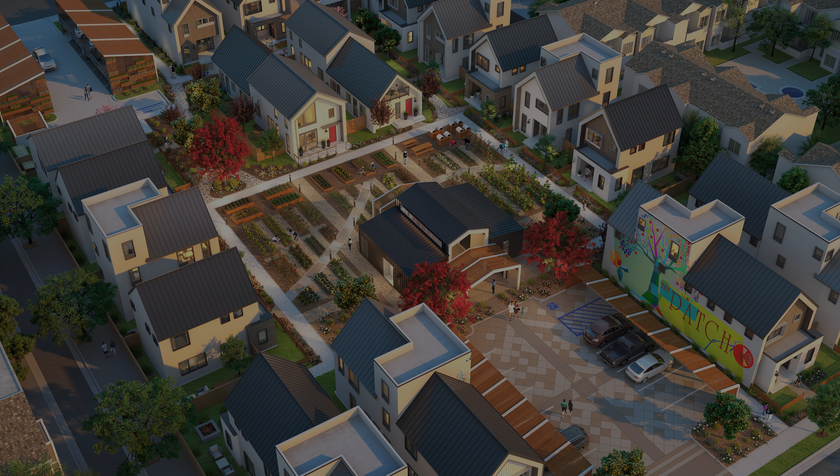The United States currently grapples with a housing shortage of between 4 and 7 million homes, a number that continues to grow. Interest rates may rise or fall, but until the root of the housing supply issue is addressed, widespread unaffordability will persist, and many Americans will find homeownership out of reach.

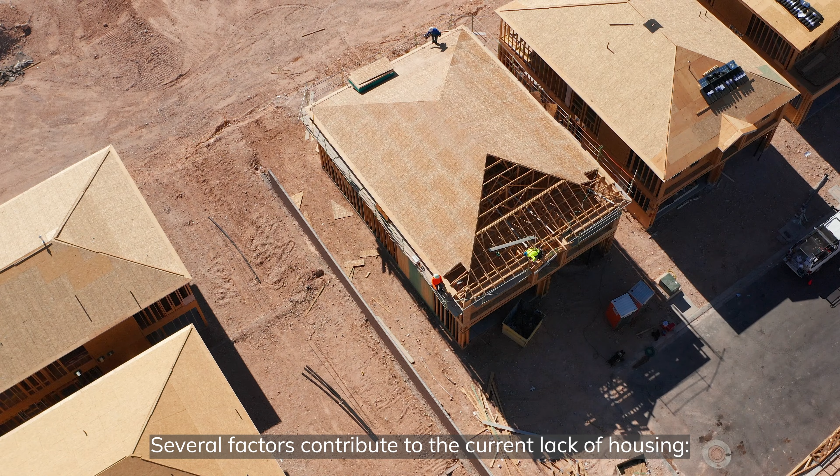Several factors contribute to the current lack of housing: labor and material costs, land values, government regulations, and approval delays, among others. Looking to create more attainable housing, many developers have prioritized development of smaller homes, situated closely together to minimize land use. Reducing both material and land costs can reduce the expense passed on to buyers, expanding affordability.

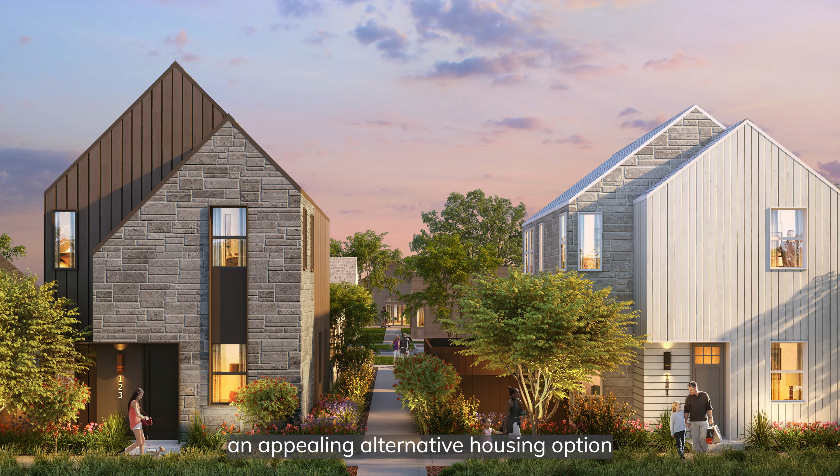Additionally, young families may find small homes on small lots an appealing alternative housing option through build-to-rent communities.

However, city planning requirements often limit these strategies. Zoning regulations and parking minimums drive up both home sizes and paved site area. Aggressive parking requirements have led to nearly 2 billion parking spaces throughout the United States, roughly 8 parking spaces per car.

Municipalities have noticed the negative effects of overparking on new housing development and have responded by reevaluating parking requirements, particularly in transit-oriented communities. In 2017, the city of Buffalo, New York was the first in the United States to abandon parking minimums. Since then, other cities have followed their lead, from Santa Monica, California to Hartford, Connecticut.

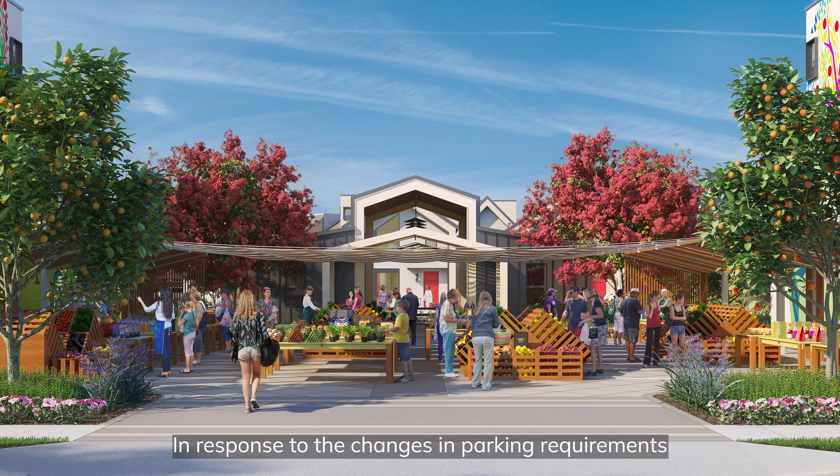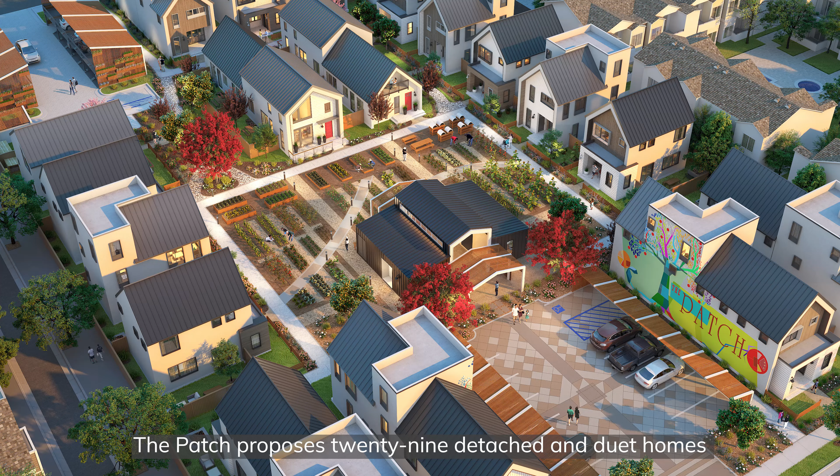In response to the changes in parking requirements and the widespread demand for more attainable housing, KTGY's Research and Development Studio developed the Patch, an infill design solution for walkable, attainable housing. Designed as an agri-hood community, the Patch proposes 29 detached and duet homes situated around a working community farm.

Elimination of internal streets in favor of a network of walking paths and increased shared outdoor spaces helps to encourage community engagement. Mechanical parking located toward one corner of the site serves residents while prioritizing an active and engaged lifestyle over the convenience of attached garages.

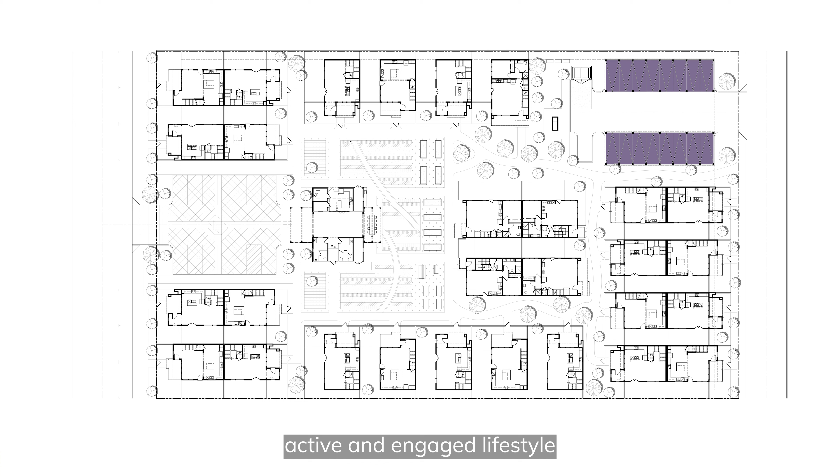A small guest parking court located toward the front of the site doubles as a space for community gatherings such as a farmer's market. The community farm is centrally located within the site, with a community building positioned between the entry court and farm to provide restrooms, storage, and a community kitchen supporting neighborhood events.

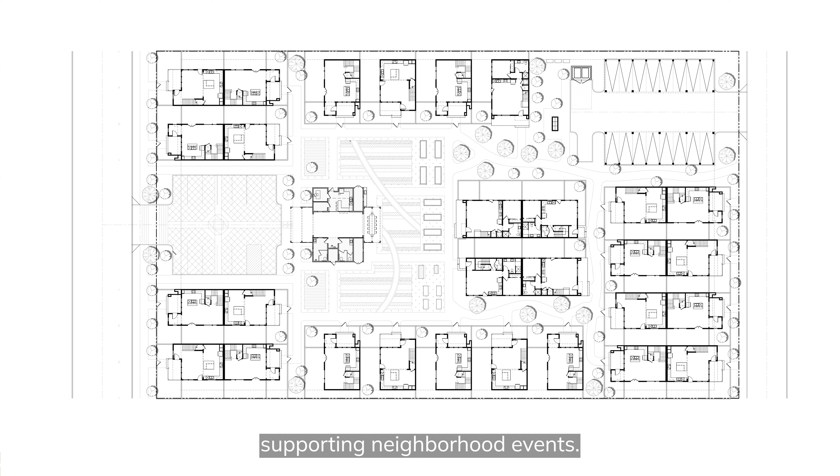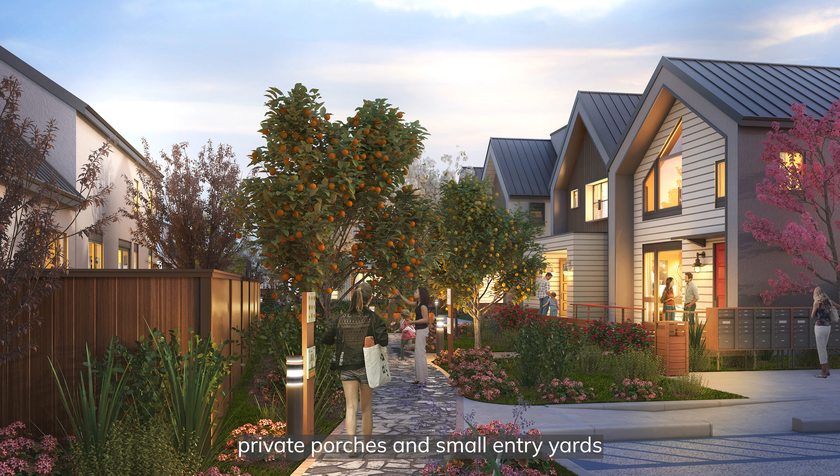Oriented around the shared community spaces, the Patch includes modest homes ranging in size from 1,000 to 1,500 square feet. Though the homes sit closely together, private porches and small entry yards create layers of privacy within the community.

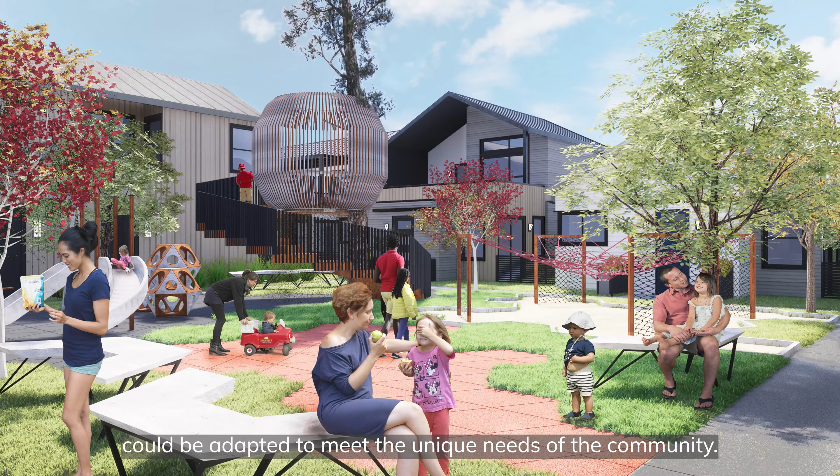The central community farm within the Patch neighborhood aims to encourage healthy eating and social connectivity. However, the shared outdoor amenity space could be adapted to meet the unique needs of the community. Whether a heavily programmed play area or a more flexible open green, the sharing of outdoor spaces brings neighbors together, supporting social connectivity while reducing costs that would otherwise make this type of community unaffordable to many.

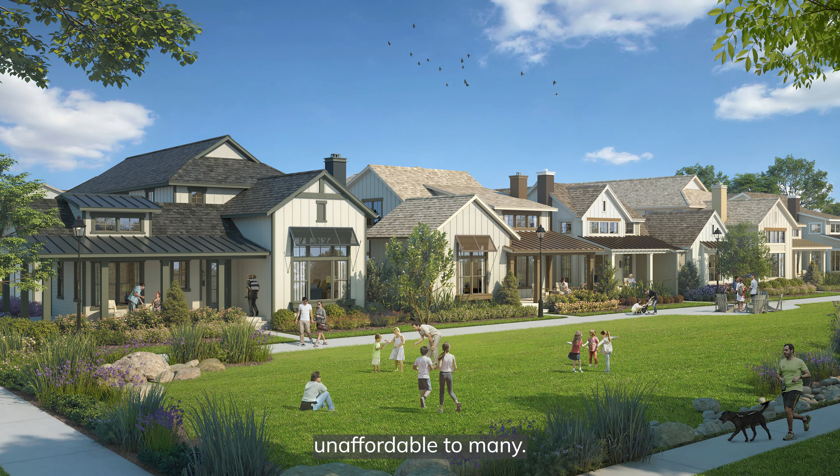Through creative solutions for access, outdoor spaces, and parking, design can help address the housing shortage crisis, making the dream of homeownership a reality.